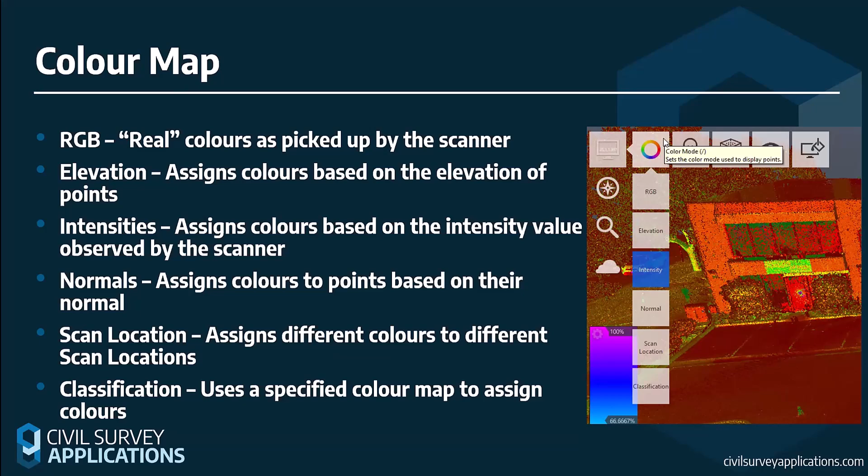But again, once you've gone ahead and done all this, you're then going to go ahead and edit your point cloud. Once that's done, you're going to export it out to Civil 3D. Civil 3D, again, allows you to import and view your Recap point clouds, and allows you to create a surface. You can create this out of either a portion, a selection of your point cloud, or the entire thing. You can also filter out different points based on different elevation ranges using the non-ground filtering option, which we'll talk about more in a second.

From here, you can do the general Civil 3D things. You can do your surface editing, point creation, point group control, and the point cloud color map can also be set here. So anything you've done in Recap can be mimicked here for visualization purposes. And you can do further cropping as needed.

So I mentioned non-ground filtering for filtering out points based on elevation ranges. You've got three different options here: planar average, Kriging interpolation, and no filter. I generally find Kriging to be the best option here. What it does is it finds an average of all your points, and it's going to use a curving method to basically filter out anything above that elevation range. It'll spike up where it finds things like trees, cars, and all that, as you can see in the little diagram there. And from there, it's able to get a better estimate of your surface, in my opinion.

If you're using planar average, it takes all of the points, finds an average value across all your points, and then filters out anything above that average.

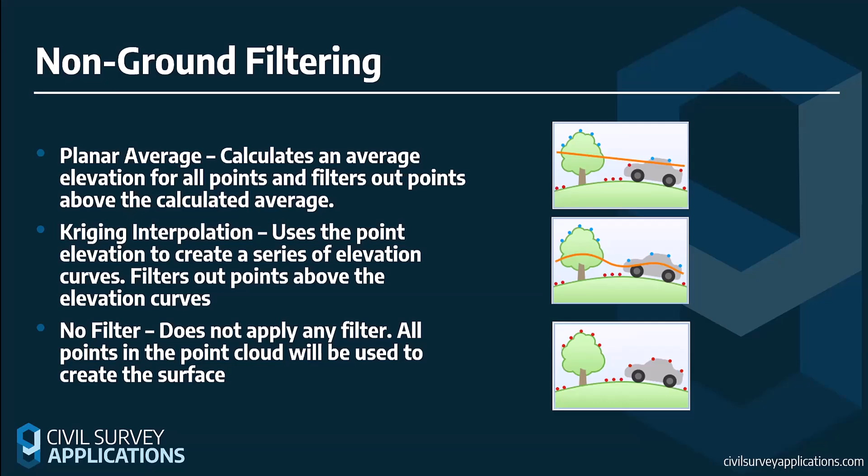So you might be asking, we've gone through the CAD options. We've looked at Recap. We've looked at Civil 3D. Where does Stringer come into this? Well, Stringer comes into this in terms of your line work, creating all that up, creating objects in your drawing, that kind of a thing. So you can create the points, you can create core locations along your point cloud using a variety of different tools that we'll discuss today. And then using those points, we're able to very quickly automate all your line work.

So you can see in the example off to the side here, I picked up the center line and edge of a road. I've gone ahead and created some points along there manually, very, very quickly. And I'm able to very quickly get all my line work created and set up ready to go. From there, I'm able to do any editing I may wish to do.

I can modify the points, I can modify the line work, I can get a 3D model if I desire. I can create objects on that 3D model if need be, and I can do things such as create scalable objects such as trees, pits, lights, all that fun stuff. So it's a very powerful tool to add on at the end once you've gone ahead and you've done all of your prior edits.

So the way I envision a workflow being, this is how I've worked on things on my end, is I see users importing point clouds into Recap, modifying how they want it to look, classifying, decimating the point cloud as needed. From there, cropping and deleting points further through a more focused method, exporting that data out to Civil 3D.

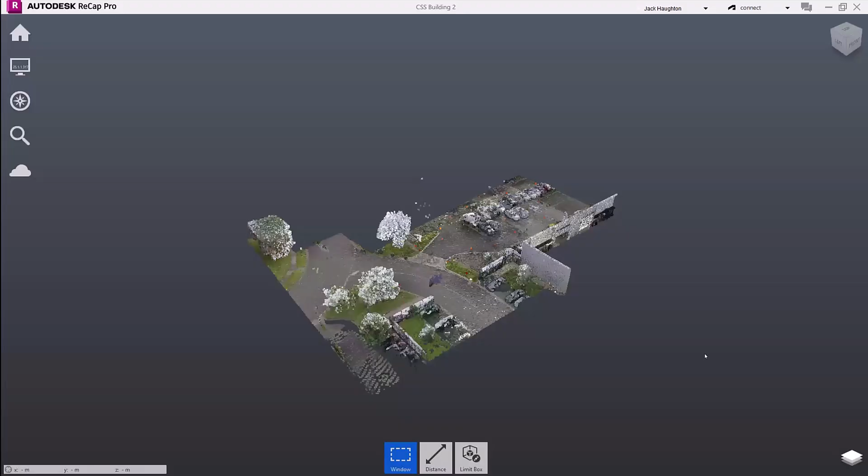And as you're in the project viewing space, once they finish processing, they will appear for you to work with. So we'll go launch project. Everything's going to appear for us. So it's just loading in now.

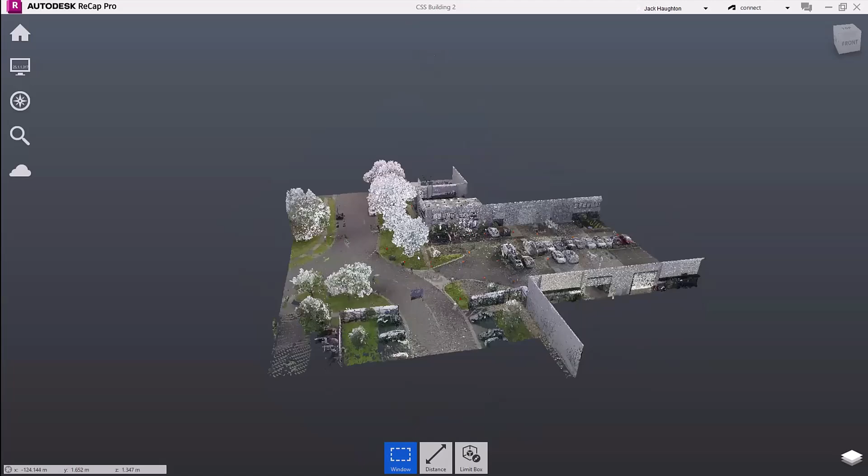And the way to navigate around here is middle mouse button to pan around. You can scroll using the middle mouse button to zoom in and out. And if you hold shift and then press down your middle mouse button, you can orbit around. So anyone's curious about how you maneuver, that's how you go about doing so.

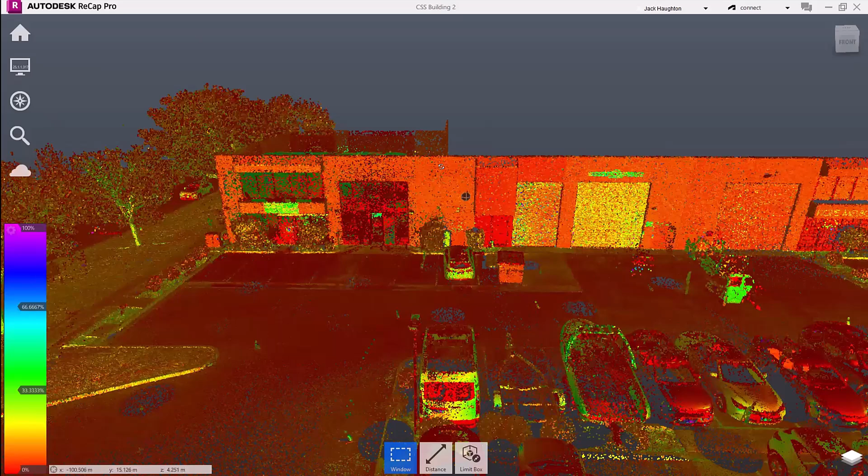Once you've imported all of your information here, so you've got everything set up, you're ready to start working with it, you can change how you want it to be displayed, and your display options can be found here. So under the first one, you have your different color map options. So say I wanted to change it over to the intensity. I can change that and you can see how the laser has reflected based on the color scheme you see here. If you want to change it over to something like elevation, you can, or a variety of other ones, as I discussed within the PowerPoint.

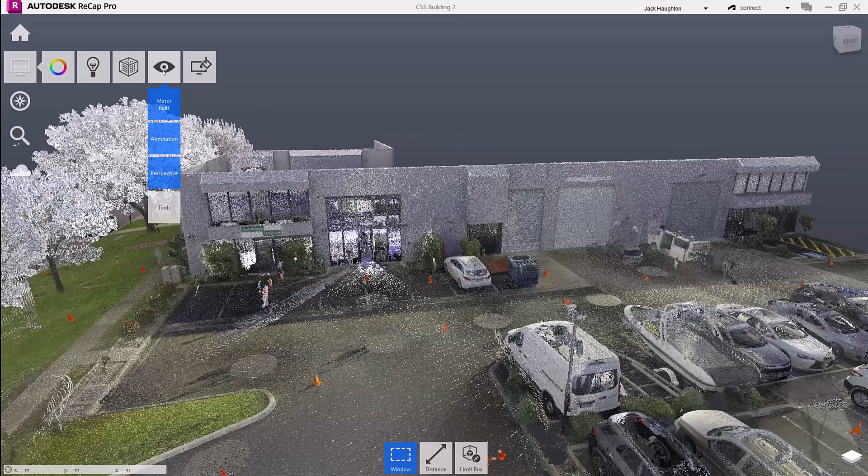You have other options to work with here, like lighting settings. You can change the point display, or you can change a variety of things here. I don't find these ones to be particularly useful. I primarily stick within the first three here, and even then, I mostly just switch to color mode, which is why I discussed them in further detail earlier.

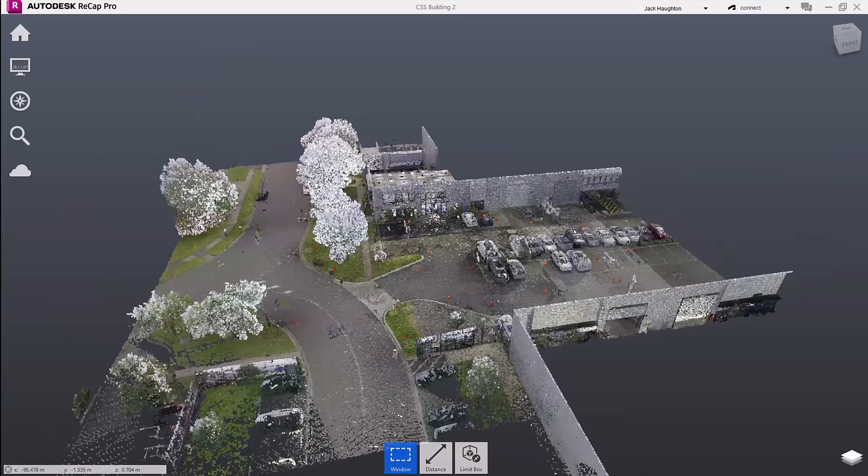If you're needing to select anything in this view, so let's say I want to classify an area, you can simply maneuver yourself so that you can very easily see what you want. I find using a side-on view, so I want to select all these cars here. I like going into as much of a side-on view as possible. Then I can very easily just use the selection tool. So that was just holding down the left mouse button and then selecting the area.

And then down the bottom, you've got a variety of tools to work with. We'll talk about Clip more later on, as I like working with that at a later stage in this. But if you need to separate this data out, you've got the ability to create a new region. This allows you to zoom back in on this location at any time using the region controls found over here. But you've also got the ability to classify this data. If you have not classified this automatically using your scanner, this is where you can manually do it.

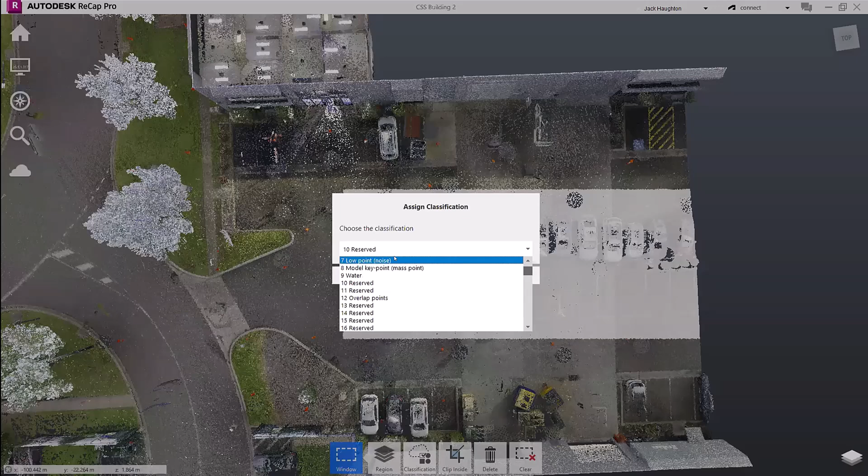So if we select this, it'll actually say, okay, what classification do you want to assign to the points you have selected? There are 12 in here by default, which you can see listed, and then you've got a number of them set as reserved. Reserved are ones that you are freely able to customize. They don't have any standard basis to be able to use from. The first 12 are ones that are commonly used by surveyors, so I would recommend leaving these as is, only changing the ones from 13 up.

In this case, we're not too fussed about what they're going to switch to, but you can assign them as needed. Click assign, that's going to assign those classifications. And you can see if we go over to this database icon here, classifications, we now have one set. And if I toggle that off, you can see they're now hidden.

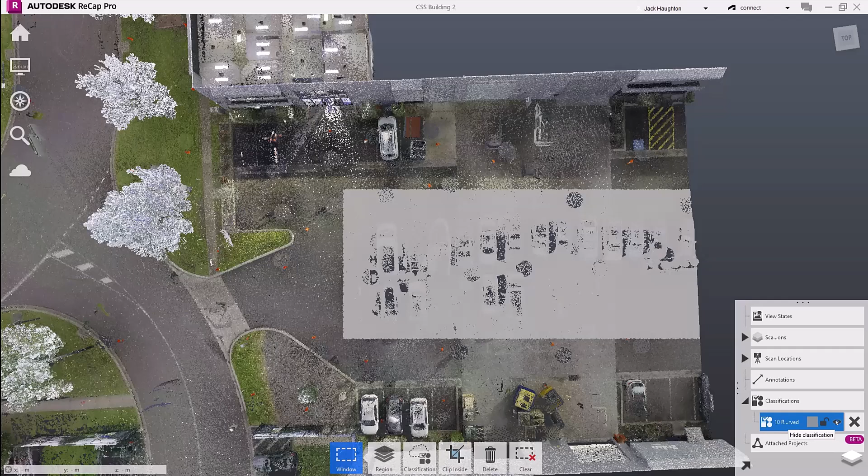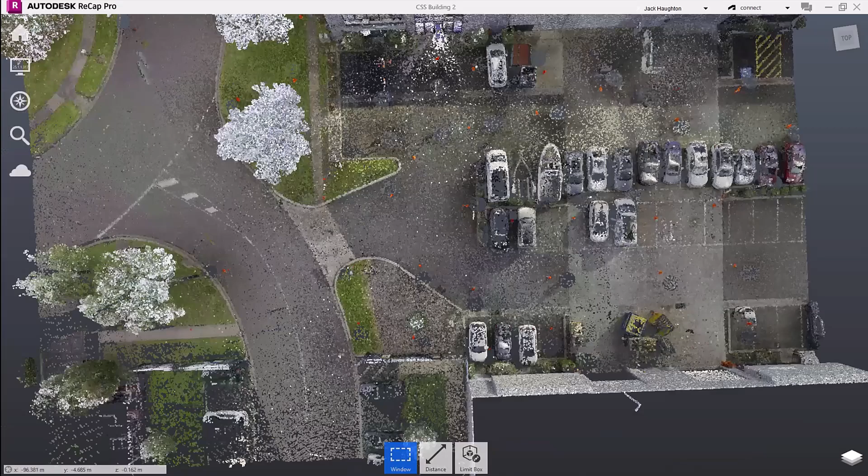One thing to keep in mind, even if you hide the classification, it does not work the same as how Clip will later on. This purely hides them. They can still be selected and they can still be edited. So keep that in mind. This will only turn off the display. We'll talk about Clip and delete later on, but the last option here is clear, and that just clears your selection that you have set. So very easy to work with.

Next up, what I would like to do is basically configure how I want this to work. Depending on what you're going to be doing with this point cloud, you'll probably run one, if not both, of the next steps. If you go up to Home, you can come across here to these two options. You'll have to hover over the automatic ground classification for the bottom one to appear. But these are the automatic ground classification and the decimate points options.

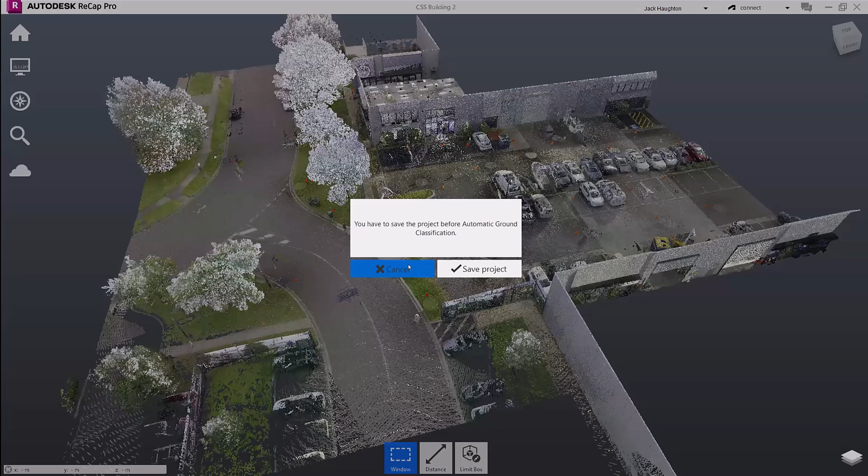Both of these are very handy in quickly filtering out the data in your point cloud, ready to be brought across into Civil 3D. Now, if you're just looking to get a surface out of this, and you're not too fussed about having the features or anything, I recommend just quickly running automatic ground classification. Running this, it's going to basically just ask us to save it, and then it will go ahead. I won't run this at the moment. We'll see the results for it shortly.

Once that's run, it's going to go ahead and try and separate everything out based on whether or not it thinks that it's working with ground or with an object that isn't a part of the natural surface. So it'll automatically run through and do that. And in my experience, it actually does a pretty good job of filtering all that out. It's not perfect. You will have to go through and manually do some clipping or deletion, but it is a very powerful tool.

The other option, if you're wanting to retain the majority of your data here, is decimate points. Decimate points allows you to separate your data out into different classifications. So you can see here, I currently have source classification as reserved. I'm going to export out a part of my point cloud into a different classification, in this case, model key point. And you're able to decimate by either an approximate percentage. So if you just want a general amount to be removed, use that.

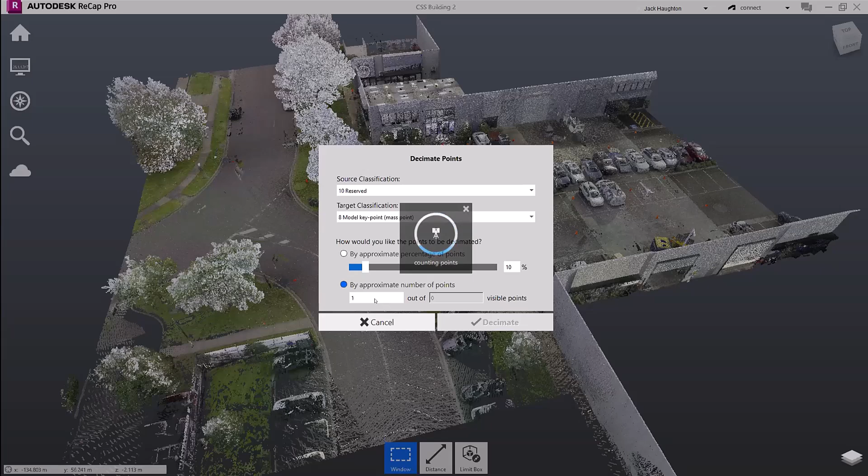Or you can go by approximate number of points. It'll go ahead and list the entirety of the points in your drawing, and you're able to filter out by whatever number you decide. So you can see I have this obscene number here to work with, and I'm able to filter out as many as I want. It'll place all those into the target classification, ready for you to work with as needed.

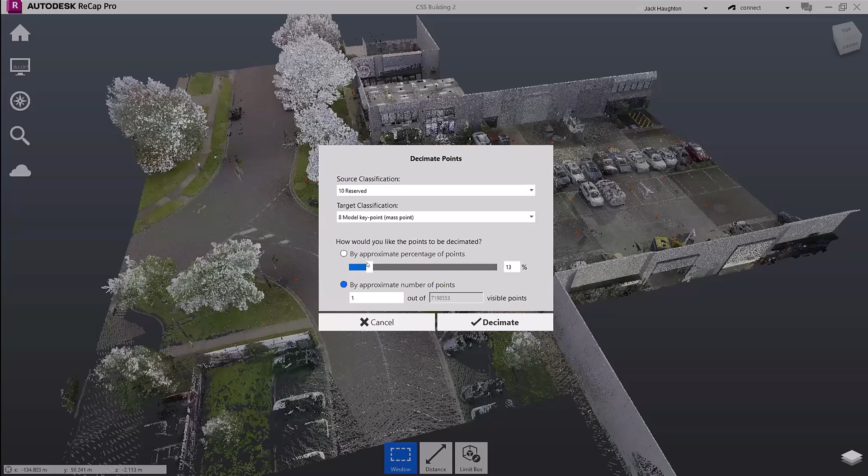Now, this can take some time depending on, A, if you've already gone ahead and deleted or clipped points in your drawing, and B, how many you're working with. So if I move this up to 50%, for instance, it's going to go ahead and decimate at 50. That's going to take longer than if I set it to something like 10%, for obvious reasons. Depending on your laptop will be how long it processes for. I recommend setting that up and then going and getting a coffee or going for a walk, depending on the size of what you're working with.

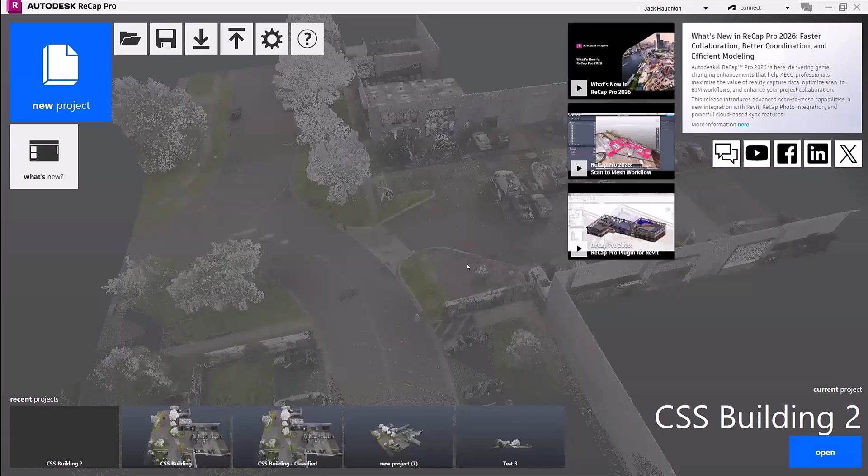So we're just going to go back to the home screen, and I'm going to open up the exact same drawing that's already been classified and has had a decimate run on it. So we're on this one here. You can see it's a little bit more blurry when I move around. That's a result of the decimation. It's just separated everything out. If I go down to the classification here, you can see that I have two here to work with. This is the result of that automatic ground classification that we ran earlier.

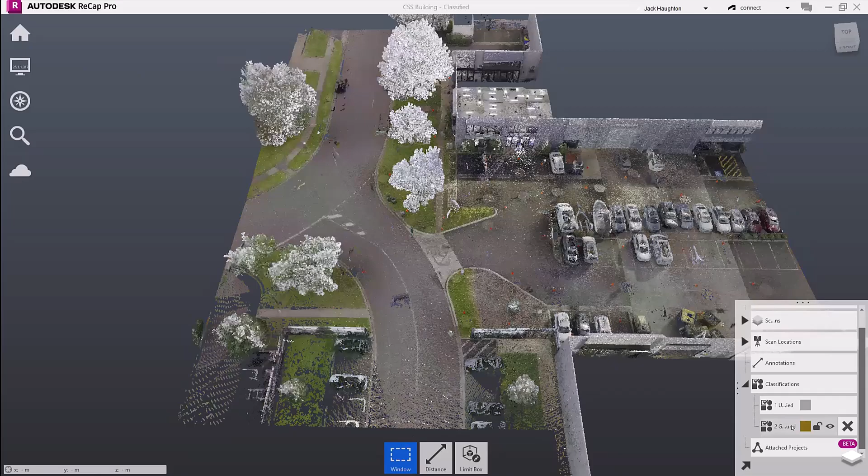If we open that up, you can see I've got two here to work with. And if I hide the ground, you can see how it's gone ahead and ripped out everything it thinks is not a part of the ground. It's done a pretty good job with that. So if we turn back on the ground now and we switch this around, you can see it's not quite perfect, but it's done a pretty good job of it. So we'll clean this up.

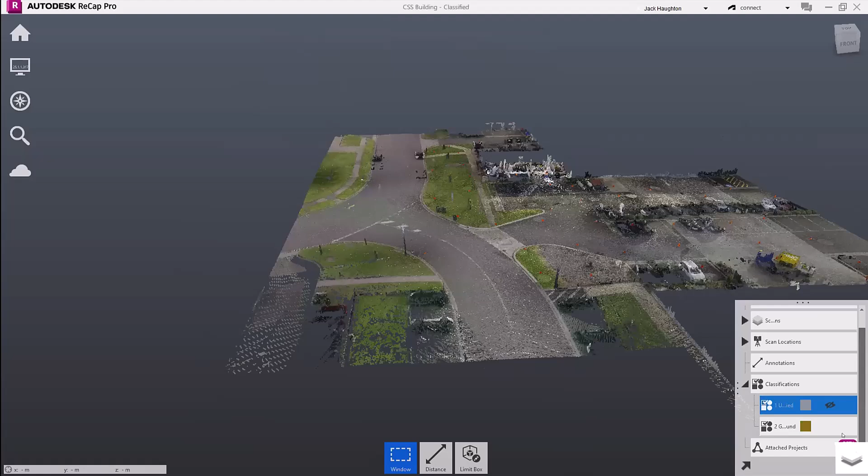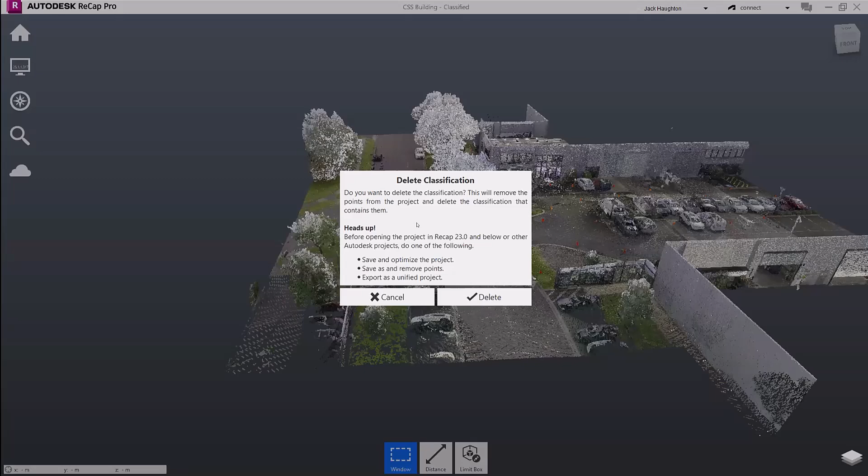But first off, let's get rid of these points. We're looking to create a surface out of this. We're not really interested in the other features here, like the building. We only want the base pad of it. So to get rid of these, there's a number of ways to do so. You can just select this option here, delete classification. This will just say, hey, look, you're deleting this. This is going to remove all the points from here. You can go delete. It's going to go ahead and strip all of them out.

If you want a more focused approach, I like, again, just getting a bit of a side-on view and then just using the select tool. So again, just right-clicking and selecting what I don't think I need. And you've got the ability to either clip or delete.

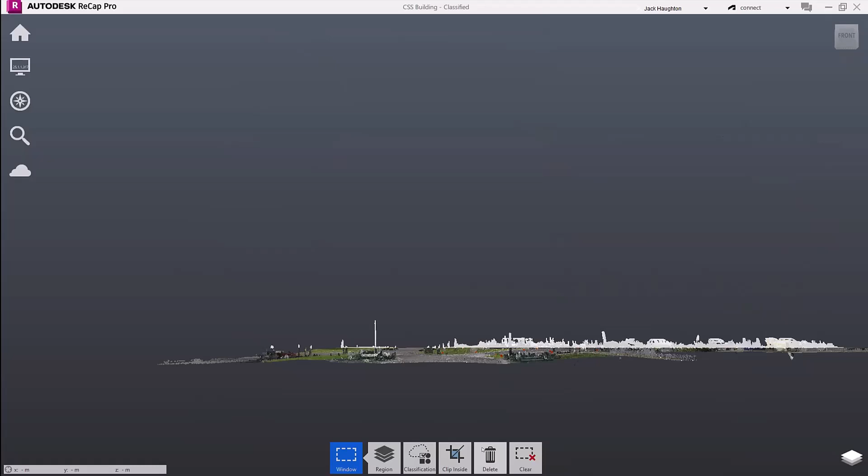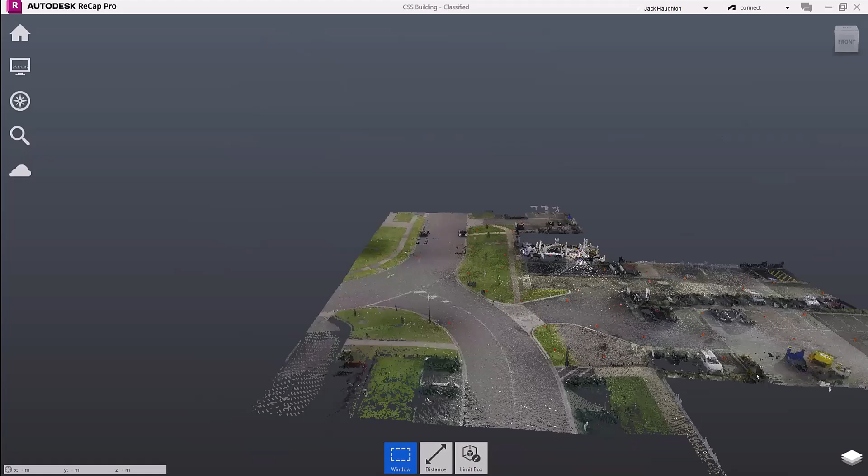Depending on what you're requiring will depend on which one you're using. If you're just wanting to turn these off basically temporarily, you're not looking to permanently export with all that included, just use clip. So we'll just go clip inside. That's going to remove all that excess data. If I export at this point, all those points won't go with it, but I can very quickly go unclip all to bring that data that I just removed back.

Further to this, any points that have been removed via classification can tend to export when you run the export command I'll talk about later. If you remove via classification, I highly recommend going to Home, dropping down the save icon and going Save As, and then just saving this as a new RCP file. That will force your deletion to remain and will make the file smaller, but it'll also shrink the base point cloud.

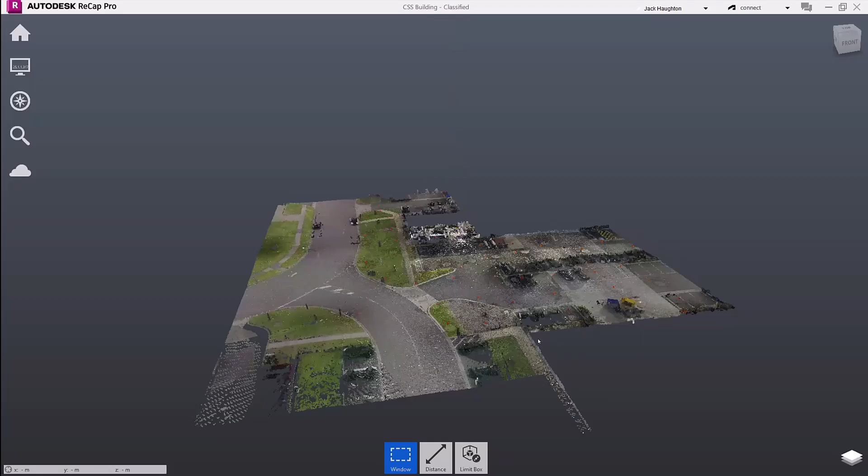So it creates a new point cloud out of this, which will be of a small size and allow you to work with it. If you're importing into Civil 3D, this is a very important step, as a smaller point cloud means it's going to run faster and better. I also recommend doing that anyway, just so that you have an original point cloud file in case you do need to revert back to the original. It just allows you to have a backup in case. So a very important feature in my opinion.

Yep. From there, you pretty much just go ahead and fiddle with it until you get something that you like, and you're ready to export the data that you wish to work with. And there are two ways to go about exporting. If you're planning to work more with the building side of things, so this is getting your internal walls, working with the architectural side of things and all that, I recommend running the publish command.

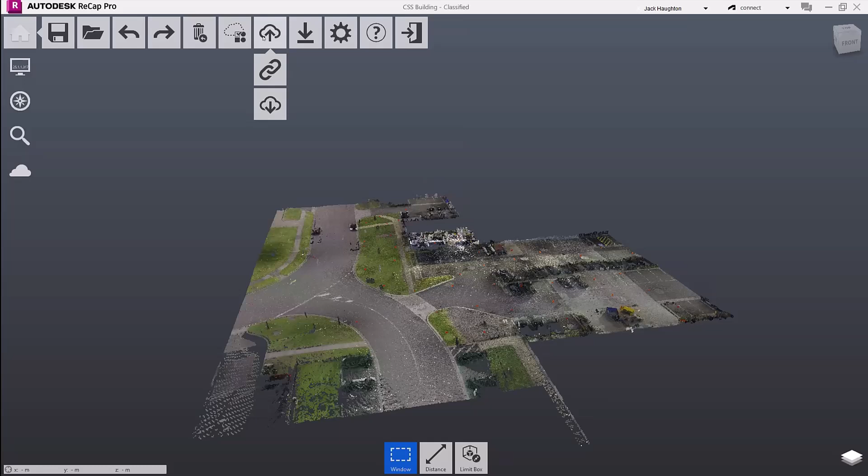Publish will push it out to your Autodesk Cloud and will allow you to run the ReCap version on the Autodesk Cloud, along with Revit and a number of other functions, which we'll go through later, and allow you to very quickly draft that up. The other option, if you're working more on a feature survey, you're just wanting to get the basics out and work with them in Civil 3D, I recommend running the export command found here. Export will allow you to export this data out as an RCP file.

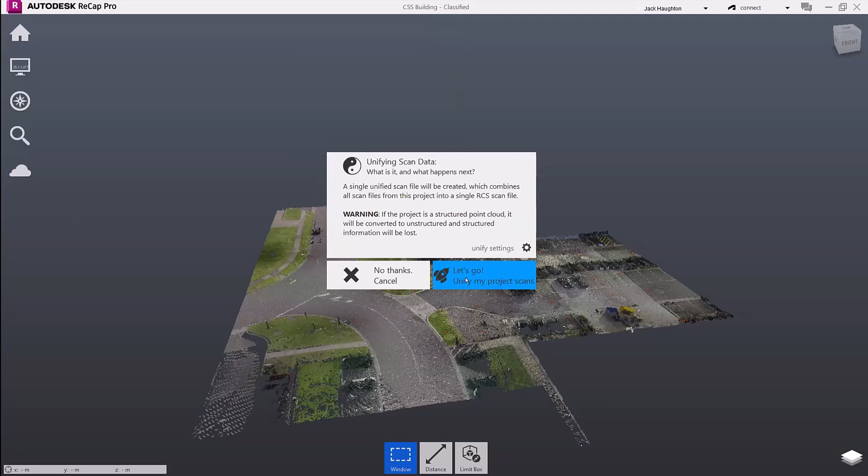So we'll call this one CSS new. And we can very quickly push that out. At the end, it's going to ask us to unify the scan data. So this is just going to merge all your separate point clouds together if you've done so, and then push it out ready for a Civil 3D import. So let's go unify my project scan. It's going to go through and export all this out. It shouldn't take us too long. And see, it's going ahead and doing that.

The other option that you saw in that home ribbon was the ability to import. If you have other files you're wishing to attach after the initial import, you can just select that option, the one right below export, and you are able to bring in additional files as needed. This includes additional folders. So if you've gone out day one, done a large amount of your scan, imported it to make sure everything's good, realized that something's missing or you need to go back and do the survey again, it's exported from your scanner as a folder. You can import both that folder and the individual files depending on what you need.

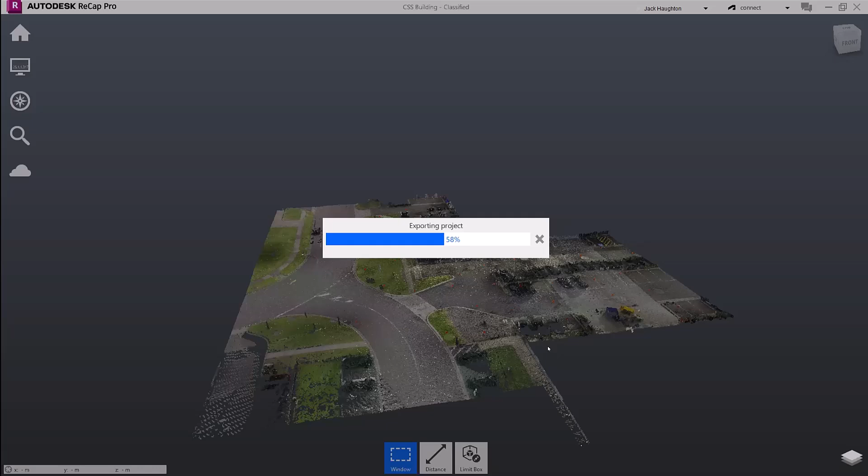So it seems I've exported a few too many points for this to quickly be done, but we'll just skip ahead for now. And I'll just go straight to Civil 3D. Cool. Bit of a sneak peek.

It's because it's trying to export that point cloud at the same time. So we're going to work with, at first, a blank point cloud here. So working with a blank drawing, there is nothing that's been imported into this. And we're going to look at importing in a point cloud ready to go.

To do so, all you need to do is go to Insert on your ribbon. And from here, you've got the ability to attach a point cloud. Select that option. It's going to navigate to a default location. I've got mine set to here, and you're able to import from there. I've already got a CSS road decimated RCP file, so I'll work with that for now. But the other one that was exporting would also be found here, as I've got this set as by default. So I'm just going to select that.

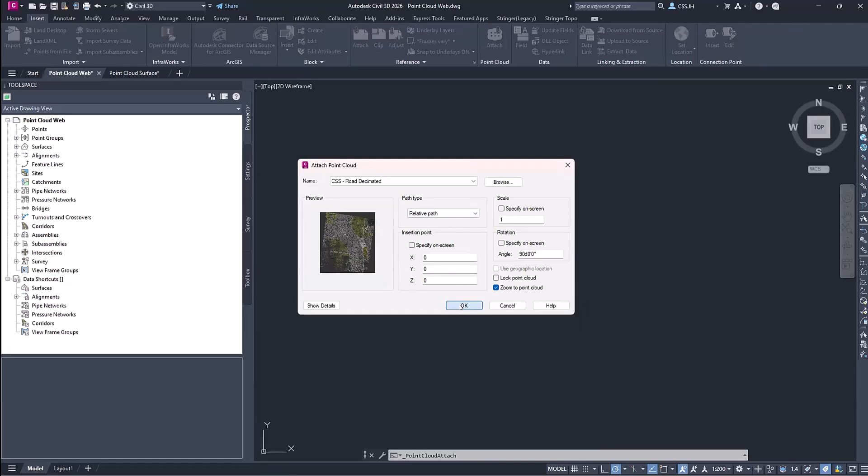If anyone's brought in a PDF or an image before, this screen will look very familiar. You're able to specify on screen where you want it to be. You can specify the path type. You're able to scale things as needed or even rotate it. I'm just going to leave it on basics for now, so it's going to import at 0, 0, 0. I'm going to go OK, and you can see how quickly that gets imported in. Admittedly, this has been modified a bit more heavily than the one we just exported, but not to a vastly different degree.

From here, you can select the point cloud. That will open up the point cloud part of the ribbon and allow you to do a variety of different things. First up, you've got the ability to modify the display of it. So pretty much this entire first section is set to that. Changing the point size is going to change the size of the point. So you can see it becomes a lot more dense looking as I push that up. I generally keep it on a 2 as I find that to be a good balance between knowing if I've decimated too far or if it's got some holes I need to look at patching by going back to ReCap.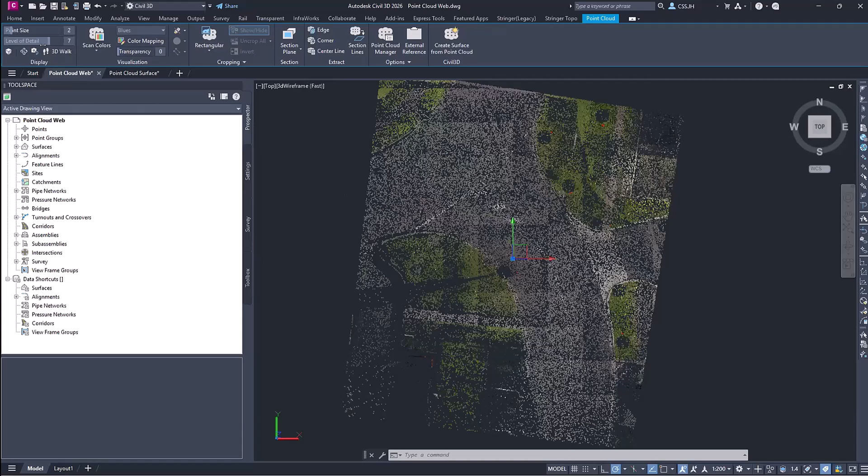You saw how quick it was to be able to bring in that point cloud. It's not a big thing, at least in my opinion, to just quickly go back to ReCap, fill in any holes you might need, and then come back here. You could even import another point cloud as needed. Level of detail, you're able to turn that on and off as needed. So it's just changing the density of that point cloud. If you find you're having some lag once you've imported, I recommend just modifying this. It might make it a bit easier for you to work with.

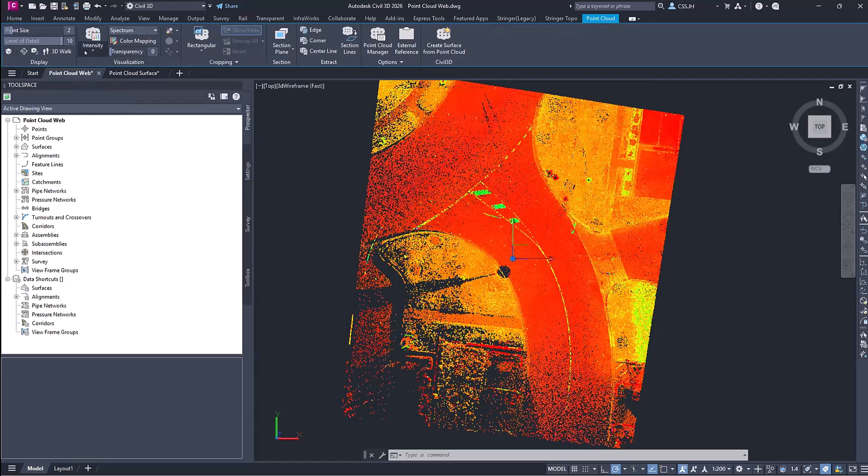The scan colors option you see here works much the same way as it did within ReCap. If I switch over to intensity, you can see that I'm able to switch between these. And if you wish to change the color mapping, you can go in here to change the color map for intensity, elevation, and classification as needed. The classifications will be set to whatever they were in ReCap. So if you've set them up manually, automatically, or via your scanner, they will come in and you'll be able to work with them as needed, shown here.

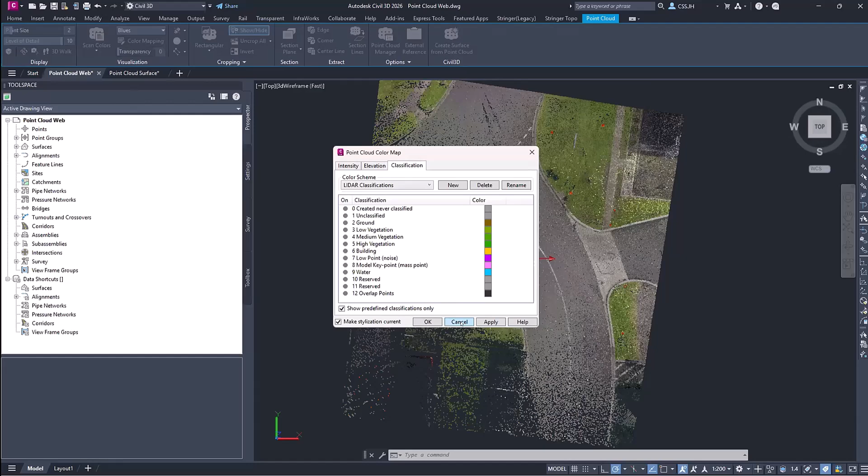Oh, whoops. Clicked too many times. Once you start actually working with the point cloud, transparency becomes a very useful tool. The point cloud, I find, is dense enough that it's hard to see when you've worked with points. I like just turning this up a bit as I work through it. It creates a transparency for other objects you may create, allowing you to very quickly be able to work with them.

If you need to crop your point cloud further at this stage, past the ReCap point, you do have the ability to crop out using rectangular, polygonal, or circular. I still much prefer doing this in ReCap. ReCap provides a much nicer environment to do this. I find doing it at this stage to be slightly laggy depending on how many points are here, but it's up to you when you want to run it. It's just preference for me.

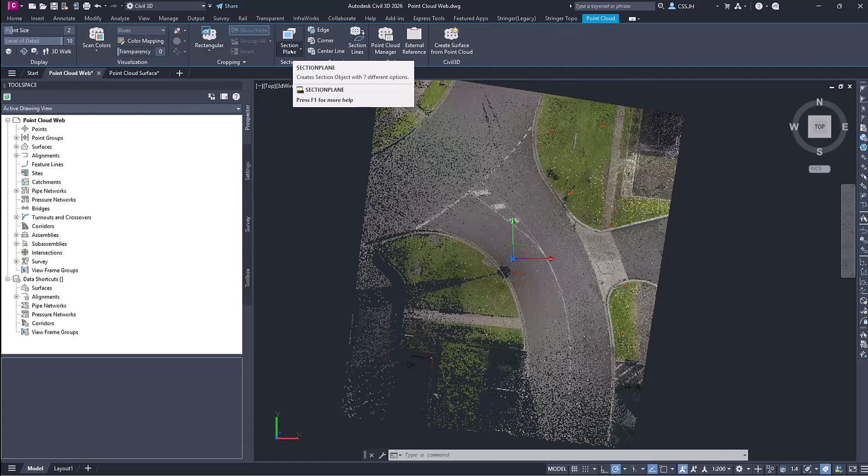Section plane can be very useful though. Section plane allows you to basically remove certain aspects from your database here. So if I realized I really don't need something on the vertical plane, I can create a top one. And if I spin it around here, you can see that we've got a horizontal plane to work with. And if I click on this arrow here, I'm able to remove or add. Oops, I've clicked on the wrong thing.

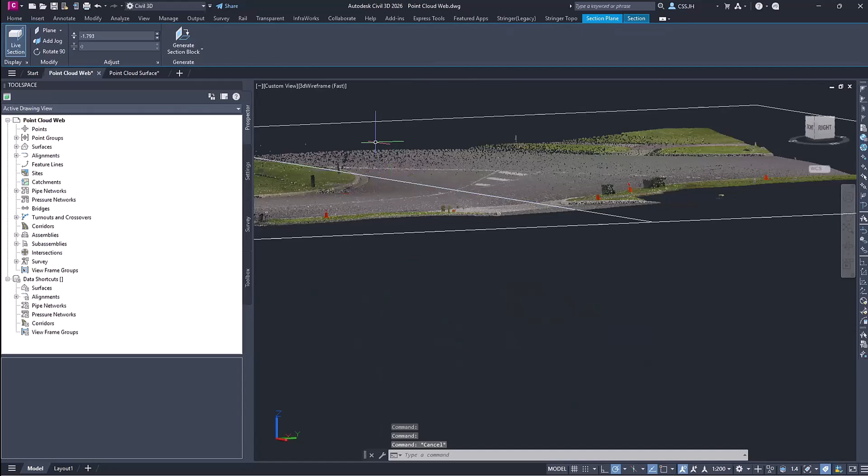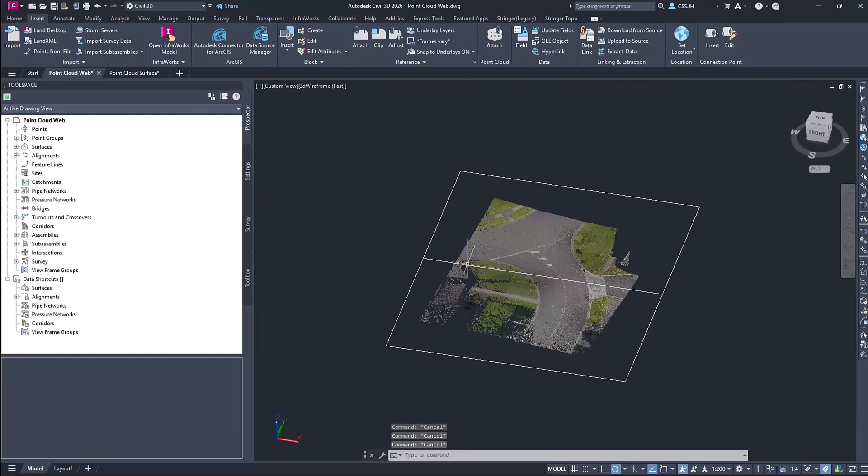You can see how I'm cropping stuff out as I move this up and down. This allows you to very quickly work with it as a visualizing tool. You don't have to just work on a top-down perspective. If I escape out of this, it just removes it from play.

You can also work front to back, left to right, whichever way you're wanting to work with it. It can be a very handy tool for very quickly removing certain sections of your point cloud from play. If you're working with buildings especially, this can be used to very quickly separate out the floors, allowing you to go ahead and do any edits you may need.

If you brought in multiple point clouds to Civil 3D, the Point Cloud Manager allows you to toggle these on and off as needed. So if I toggle this off here, you can see that it gets removed from play. Very handy if you've got multiple that you've stacked up against each other. I brought in one once with, I think, something like 18 different setups that we'd done. And this was very handy for being able to turn off different aspects of the building so that I could do rooms individually. So if you're needing to do that, this is a good way to do it.

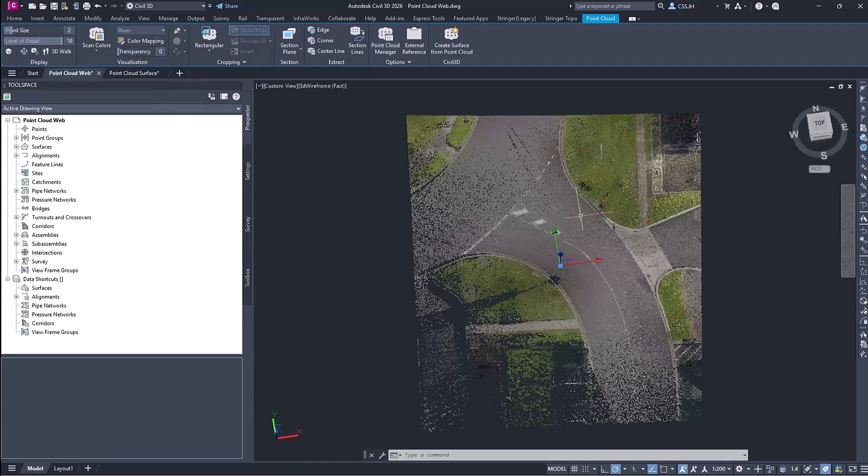Also handy if you've got too much data here and a lagging computer: turn this on and off. It allows you to get quite a substantive speed increase on your PC. So it can be very handy for that.

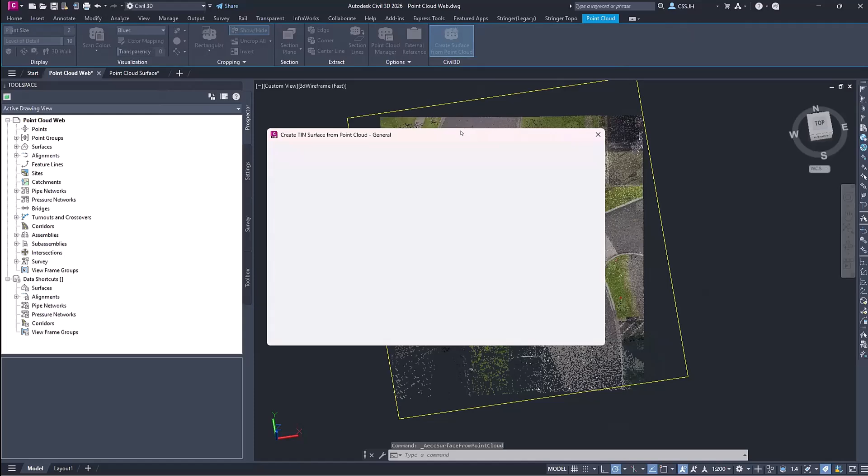So once you've got the point cloud imported and ready to go, you're then wanting to create a surface. So you go create surface from point cloud. You can see that it's highlighted what it believes to be the point cloud we're wanting to work with. You're able to choose the style of the surface, exactly the same as if you're working with the Civil 3D surface tool.

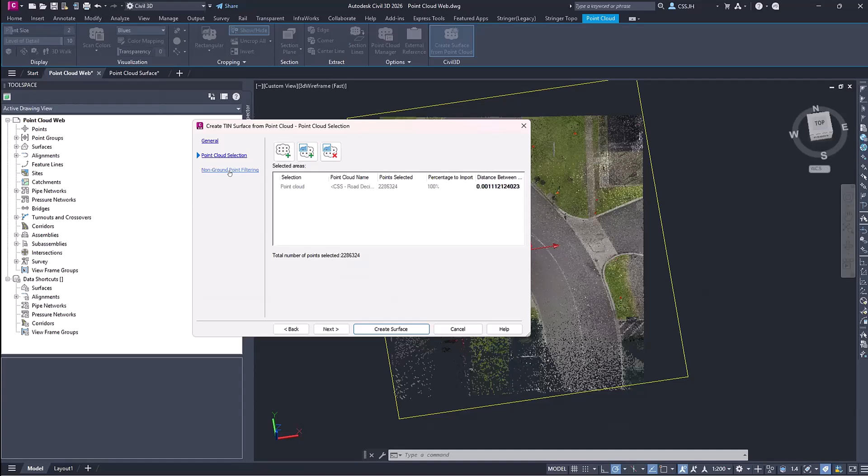Point cloud selection allows you to choose whether or not you want to work with a selection of points, if you want to remove certain points, or if you just want to work with the full thing. Just using these options here, you'll get an idea of what you're working with. You can see here how many points I'm working with, a vastly lower number than what we saw earlier, and the rough distance between each of those points. And then if we go to the non-ground point filtering, you get those three options that we discussed earlier.

As I stated, I primarily use the kriging interpolation function. I find that one gives me the most accurate surface while still removing a lot of the objects I don't wish, followed by the planar average and then the no filter, in my opinion.

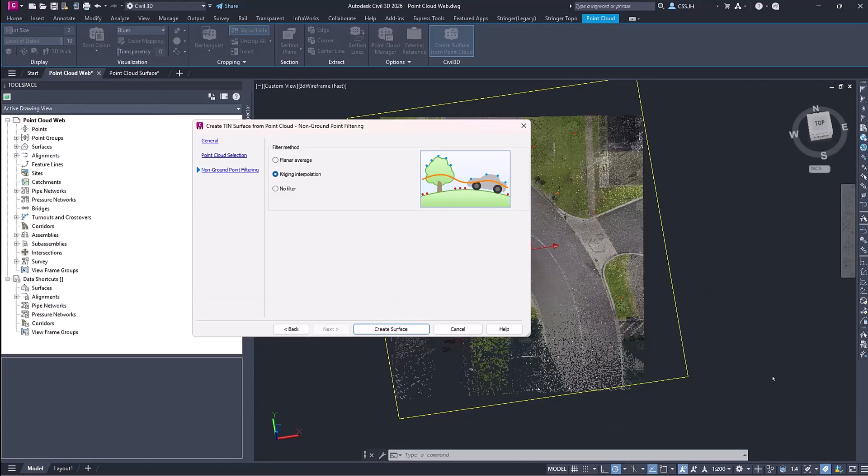Depending on the option you choose, once you go create a surface, the software will start creating a surface. You'll get an icon down the bottom corner here saying the surface is being created. You can still continue working on anything that you want within the drawing.

However, if you make any edits to your point cloud, things like cropping and such, be aware that this can cancel the surface creation. You will get a message saying that it has been cancelled, but it can happen if you edit the point cloud in such a direct way. Things such as changing the scan colors, creating new points, all that, you're completely fine. It's more the removal or editing of an already existing point cloud. So just keep that in mind.

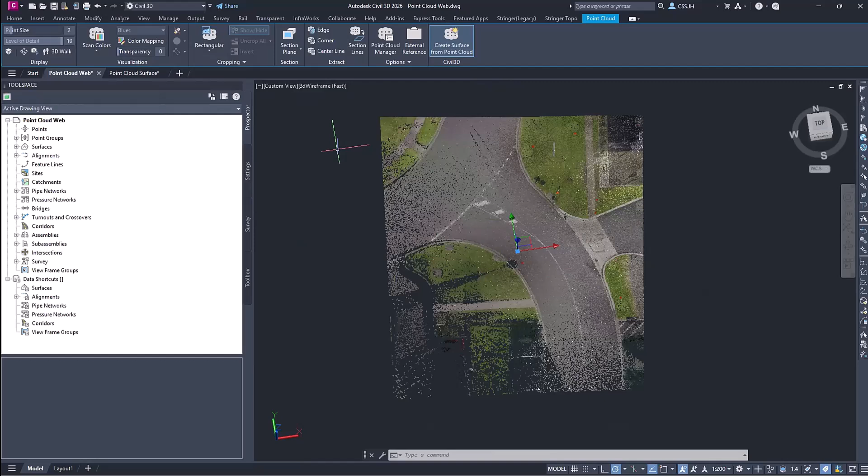So, what happens after the surface is created? Well, you'll get something along the lines of this. This is the exact same point cloud we just saw, but I've already created a surface. If we drop this down here, you'll see that one's been created.

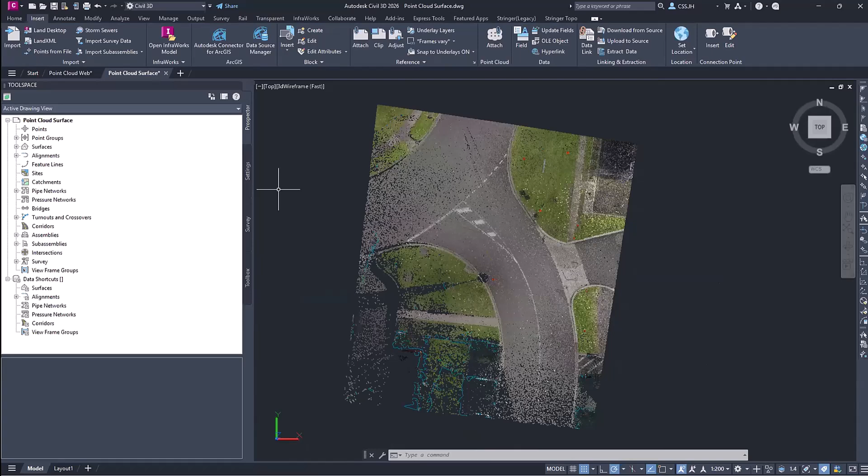More than likely, the surface will be too large for Civil 3D to handle, depending on how many points you picked up. It'll just ask, are you sure you want to export? Are you sure you want to work with this as a visual display? So it'll create that surface in a separate file, which then links into this, allowing you to work with it as needed. So I just hit accept, and then I'm able to do what's needed.

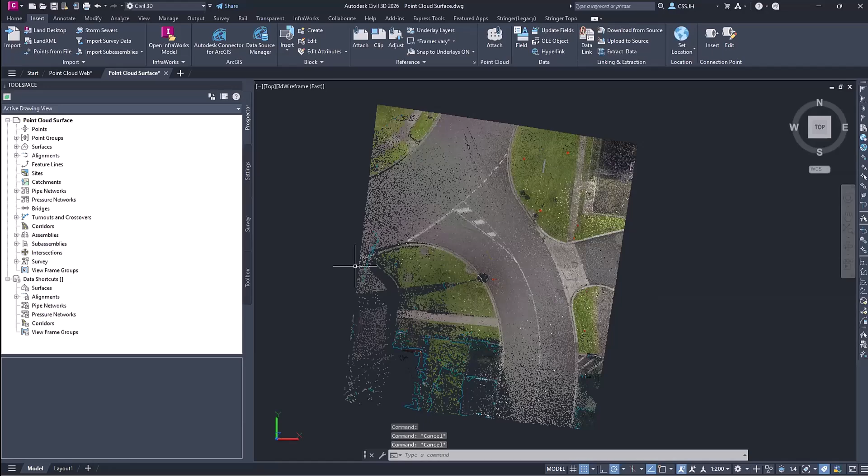After all this has been imported, the step I'm most likely to choose is to create some line work. So how do we go about creating our line work? Well, we need some points to work off of. And I don't mean point cloud points, I mean points with a code and a string number attached to them so you're able to work with them.

I like making sure I'm in a position where I can see everything. So, same as ReCap, I like being in a side-on kind of position. I've just realized I've moved us a bit too far, so I'm going to switch back to top once it's finished generating its contours. Because we've got a 3D space in Civil 3D, if you rotate it around, it's generating the contours live, trying to give us the best representation.

I'll close this just to free up a bit of space. My computer's probably overclocking at the moment as it's running a lot of high-end programs.

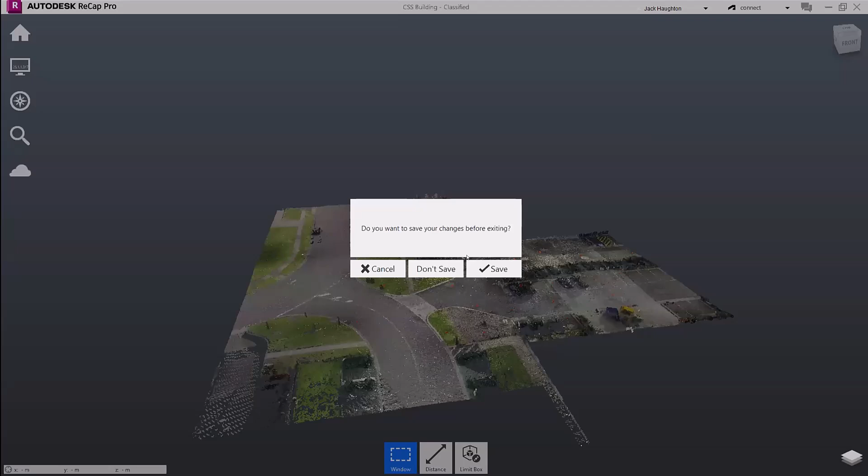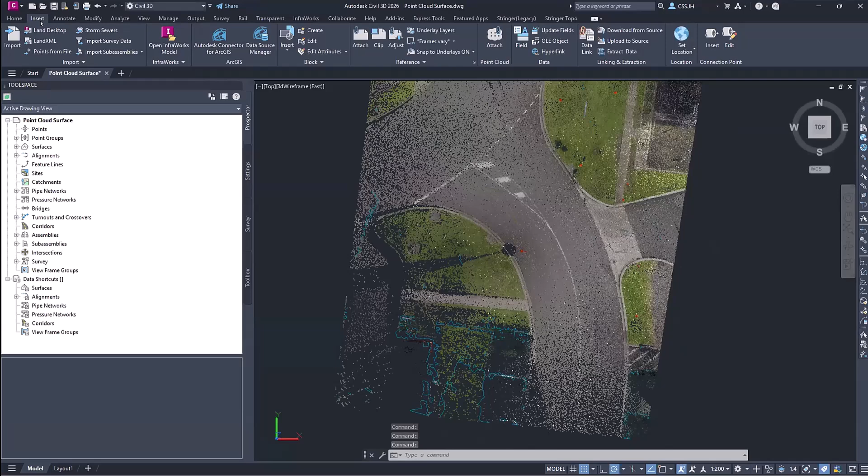While we're waiting for that to load, are there any questions to discuss, Shane? Jack, there are no live questions at this stage. There was a general question about processing that survey data, but that was answered. So we have no live questions.

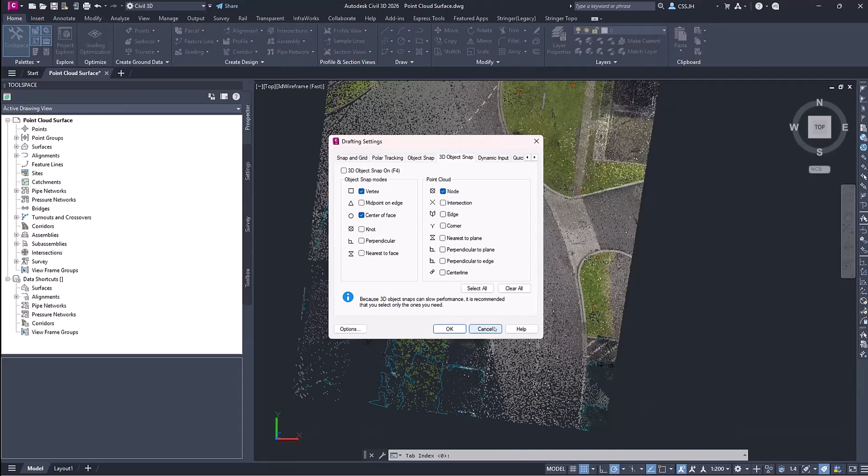If you are wanting to just create points manually, you can toggle on your snap to drawing grid, and then you can use your snap tools here. You can switch over to 3D object snap and set these up. It'll then go ahead and snap to the point cloud for creating those points. But because we've got the surface created from this, I like going off of the surface.

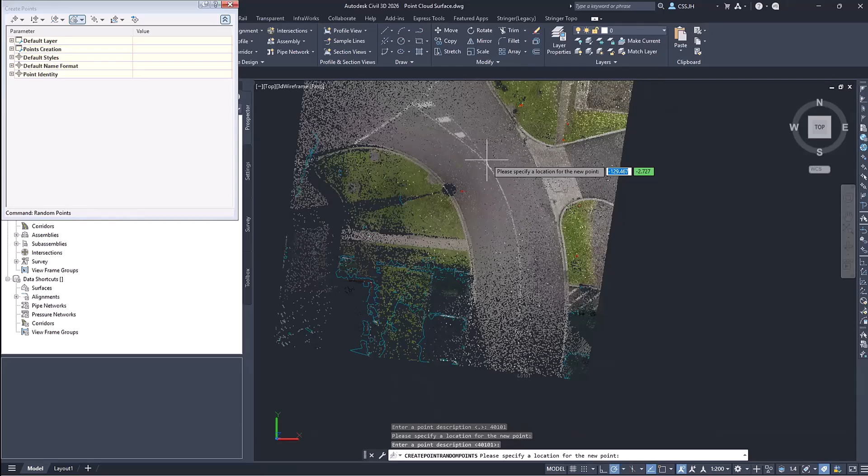So surface random points. I'm selecting the surface I wish to work with. So that's this one here. And then I can go ahead and start creating these. So it's just location for new point. Let's go here. Enter a point code. So 40101 for our center line. And I'm just going to create a few points along here. You can see how quickly I'm just going ahead and making these. And we'll create another one over here. We'll call this one 02 for a new string.

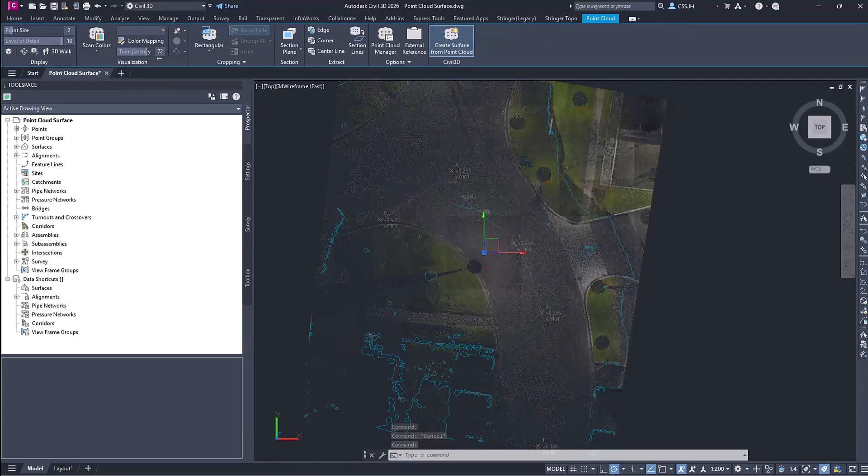So once we've gone ahead and made those points, we can then go over to Stringer Topo, and this is where we can automate our line creation. We've set up those points. Those points have a code and string attached to them. So let's turn on the transparency so we can actually see all of our points. So we can see our points being created here. And I'm going to go Stringer Topo, create our strings. And now for anyone using Stringer, we're back in Stringer land. So I can set it up for numeric, contourable, create the survey strings.

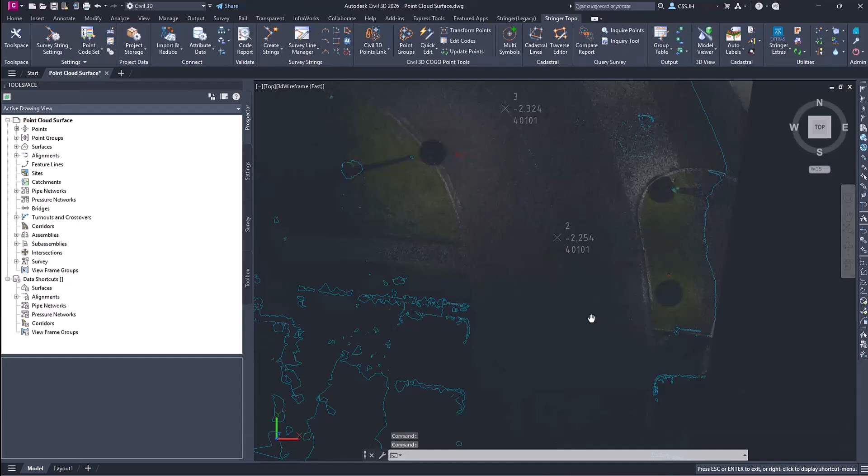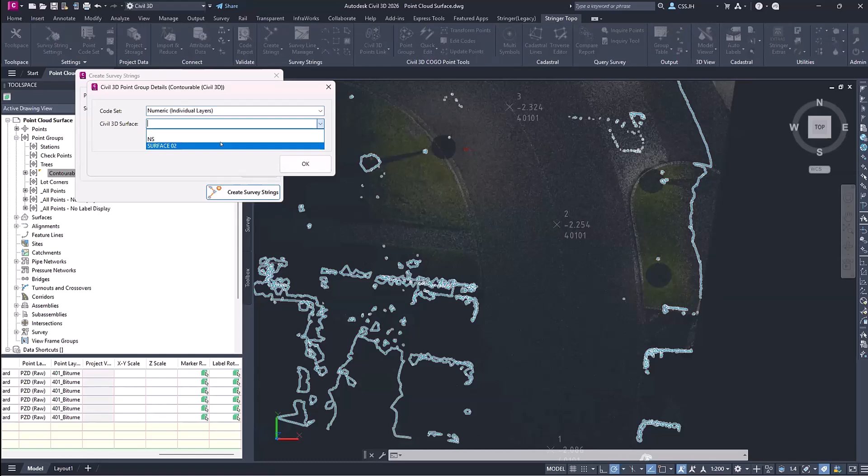That's on me. That's because I set it up at a 0 elevation and I have this set to ignore anything below 0. So let's try that again. So we see it's gone ahead and it's created the strings ready for us to go. Now, looks a bit messy at the moment. That's because I very quickly went ahead and did that. But if we then go properties, we can start doing things like, well, we could have done this earlier. I'm just doing it at this stage, but I'm attaching a .f to this code here.

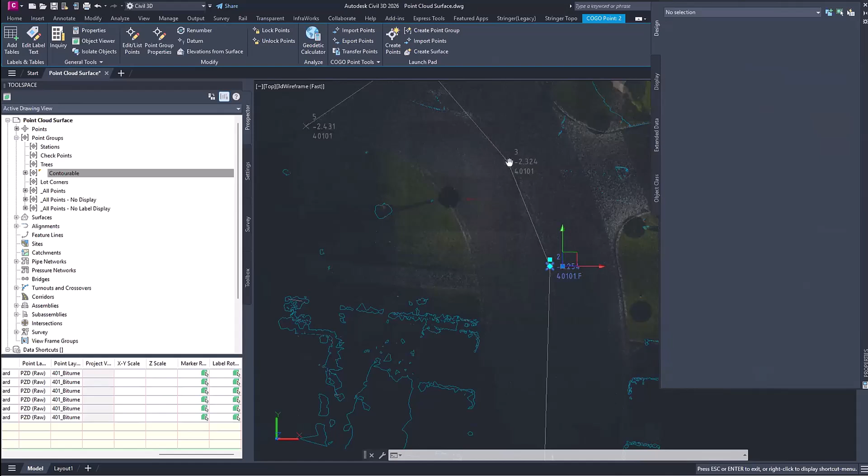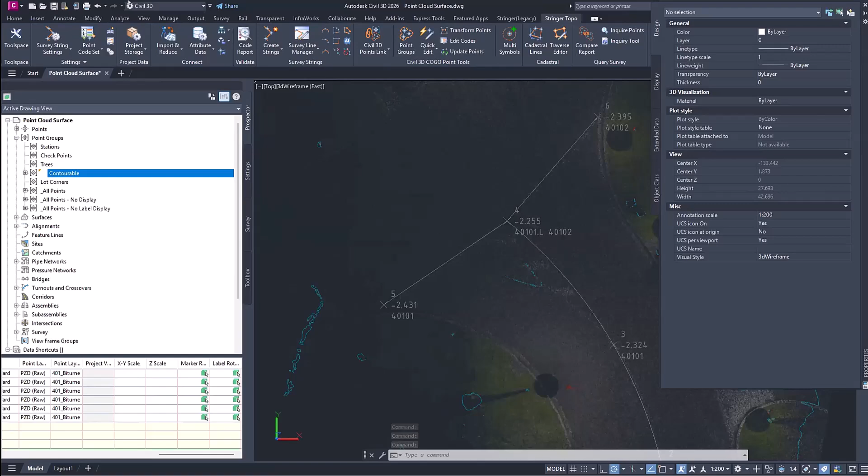Going to go up to this one. We're going to attach a, so we're two selected, .l, and then a 40102. And then if we go back to Stringer and we go update strings, you can see it's now got that curve. So it's curving around there. We've got it connecting both of those up at once. We turn off the transparency. Let's change the color of that string so we can actually see them a bit better.

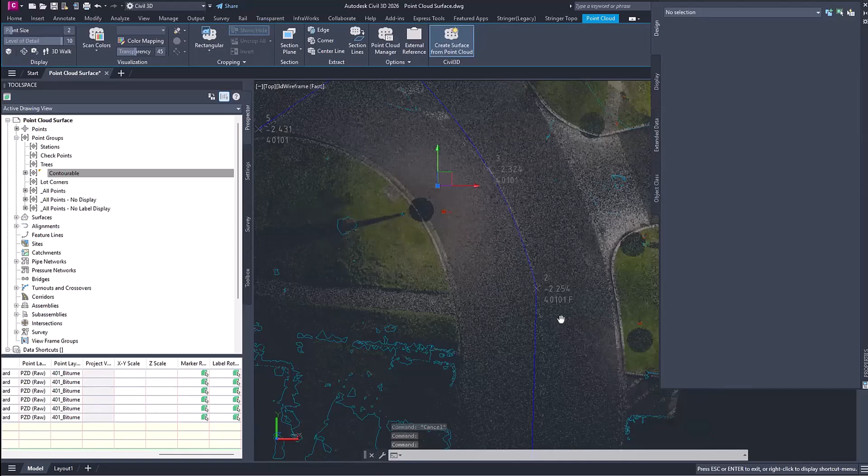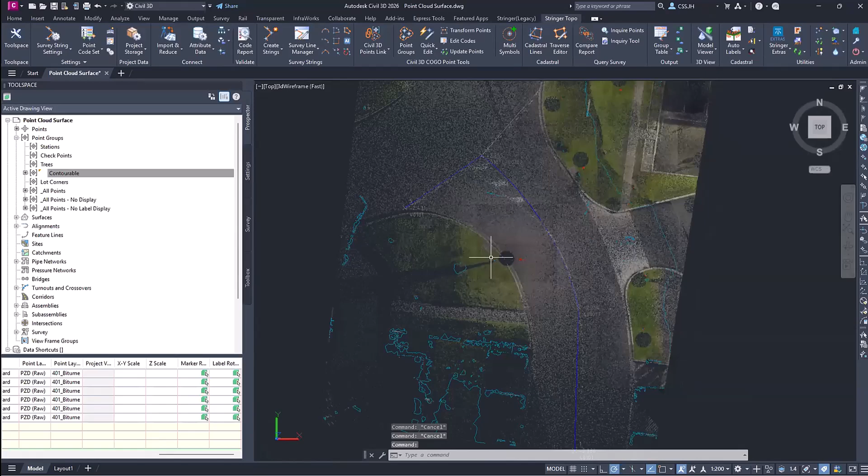We can see it's hugging that center line pretty accurately for me putting in those points very quickly. And you can go around and do that rapidly to all of your survey, very quickly getting objects in as needed, putting points in, getting your trees, getting pits in at a very quick rate. Allows you to get your line work set up very quickly, ready to go for your next step.

Once you've gone ahead and set that up, I won't show it today just because it does take a while to open, but you can run Model Viewer. Model Viewer will open up a 3D model of your surface and you're able to overlay your line work on it. As it stands, I've actually created 3D polylines out of this, and we can see that represented here.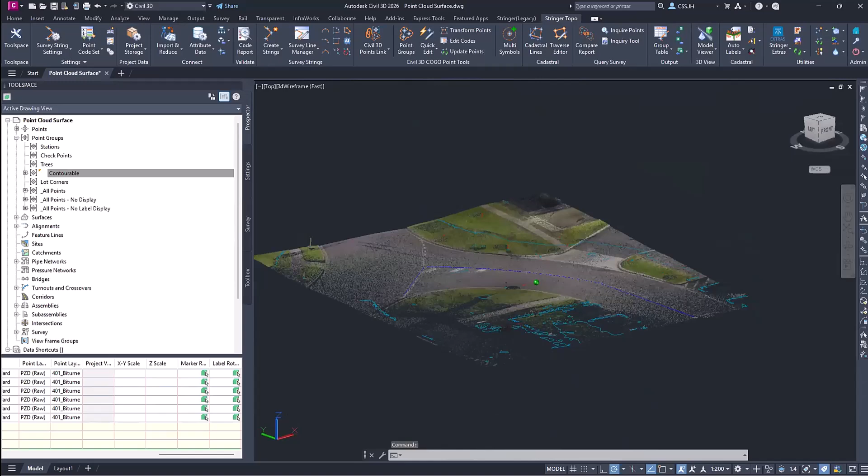It's sitting pretty much directly across our surface. Not as clean now that I've moved it and the surface moved. You can see that line work sitting there. But if you're wanting to get this in a 3D model space that's very rapid, very quick to move around in, I highly recommend running Model Viewer up.

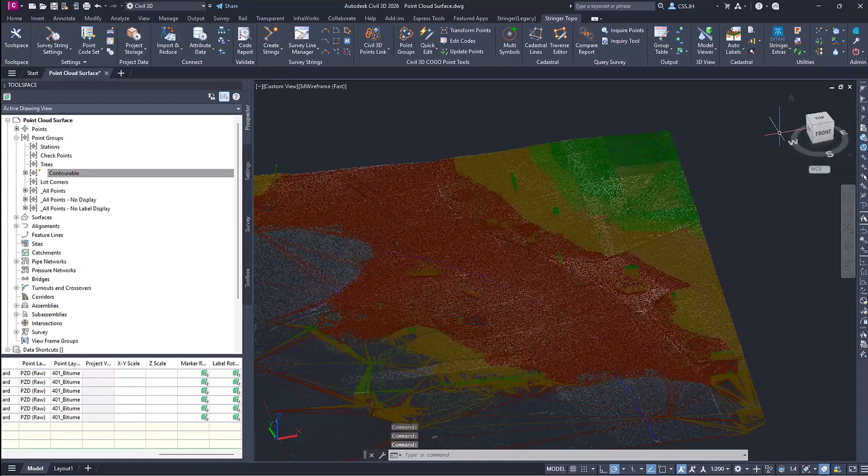It'll allow you to visualize everything very quickly, very neatly, very, well, fun, in my opinion, and craft objects over the top of it, depending on what you've created. Personally, I will generally do up some trees and run those up. And it allows me to very quickly just see the trees where they're sitting, if they're overlaying anything, and how I might need to work with them. So very handy for that.

But on that, we've actually gone ahead and, well, finished working with Civil 3D. From here, it's just a matter of drafting up the rest of the plan and then getting it ready for release to a client.

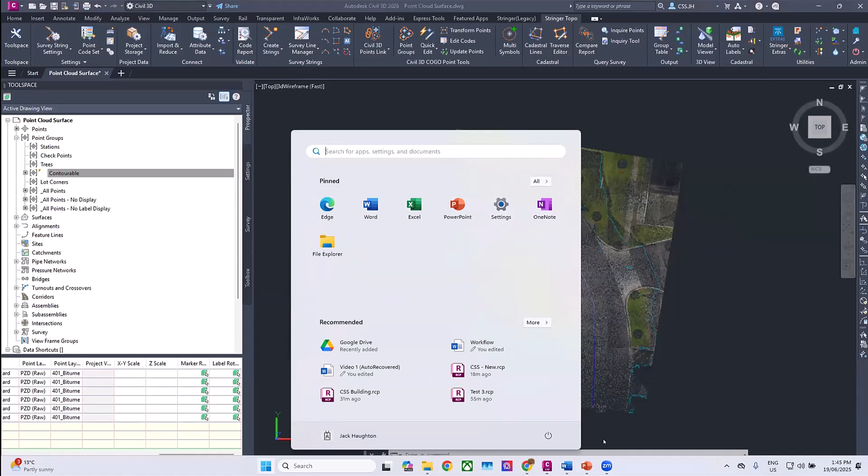But if you're working with buildings, just give me a second, I'm just going to open up a different PowerPoint. If you're working with buildings, I highly recommend running the publish command in Recap, which allows you to push out to the Autodesk cloud and using Recap Viewer. Now, sadly, I don't have a live example ready for us today, but Autodesk have provided us with a video on it that I'll just quickly talk over.

Okay, let's do it the manual way since it doesn't seem to like playing at the moment. So what we are able to do with Recap Pro is basically set it up so that we're able to work with it. You're able to create a scan to mesh. Now, the scan to mesh is going to look over the entirety of your survey and create a surface mesh out of the point cloud that you've got.

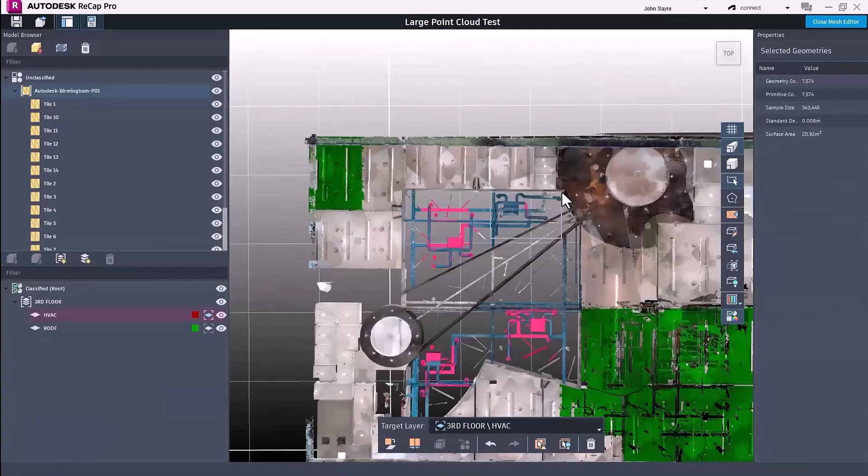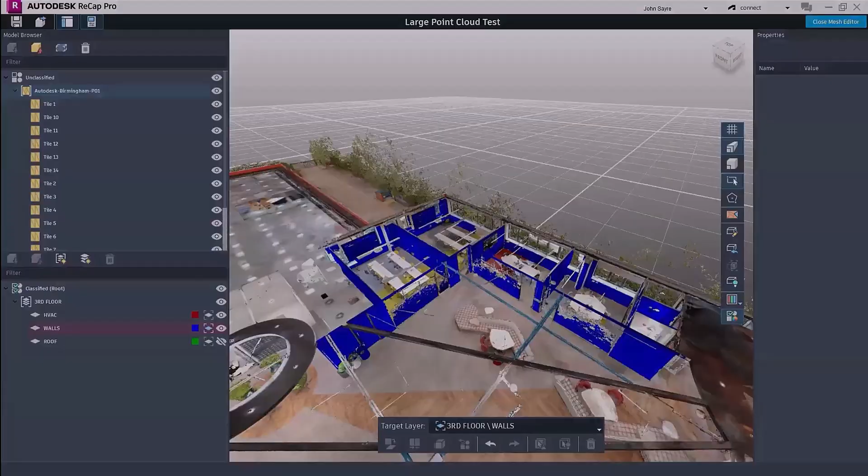From there, you're able to, as it states, very quickly create classifications to work with. And from this, you're able to also select basically walls out of the point cloud. The software is smart enough to select a dense amount of points and say, okay, this seems to be a wall. We're going to set it up as such. You can then export this out to Revit. So any Revit users in the audience, you're able to export all this out and use it for your architectural drawings.

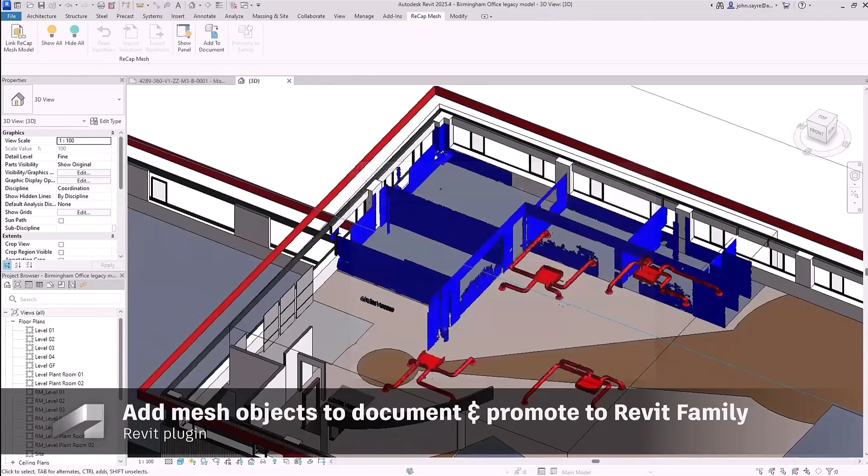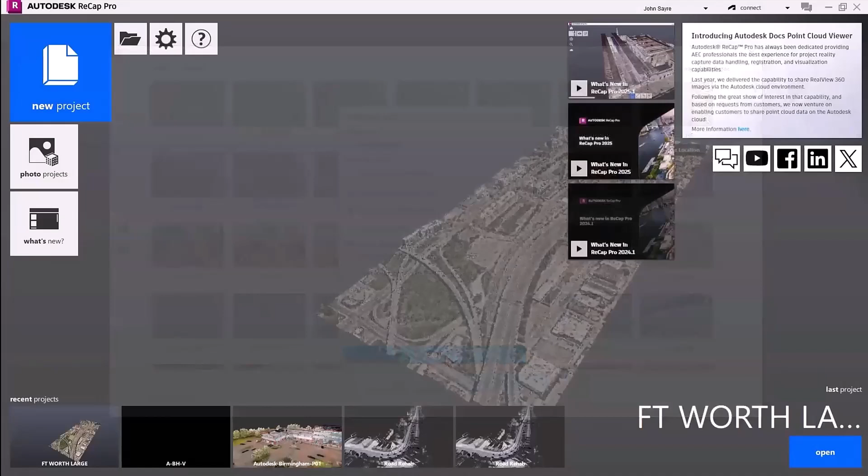One of the big things about Autodesk products is that they all are able to talk to each other. So you saw how easily I was able to go from Recap out to Civil 3D. It's just as easy to go from Recap out to Revit ready to work with. So this is actually creating a number of different files here. This is working with the photo section we talked about earlier. The photos are used to create a 3D mesh that we're able to create points on.

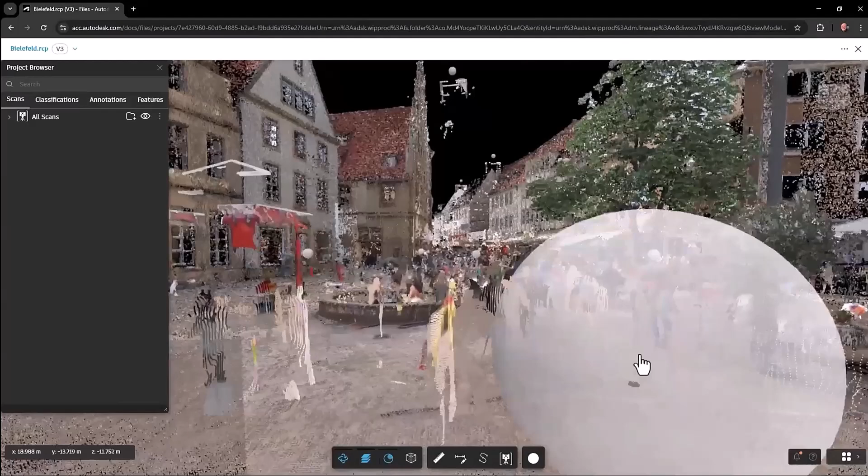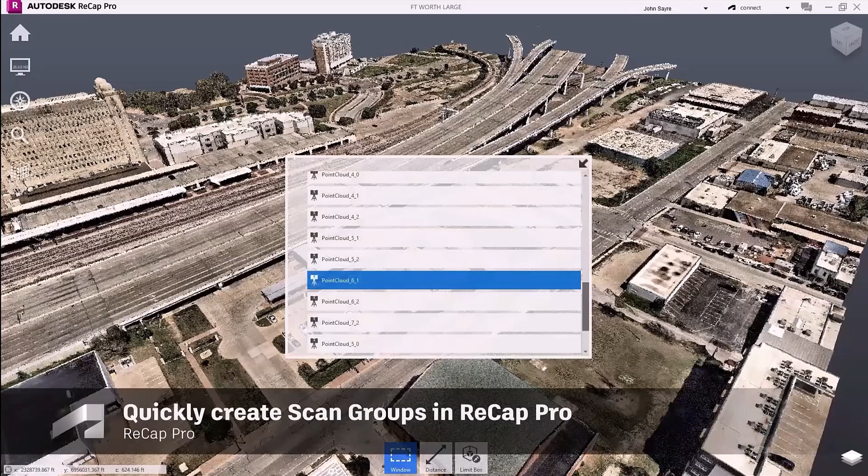But after you've worked with that, you're able to publish it out to the Autodesk cloud, where you're able to work in an online space. One of the biggest benefits about this online space is the fact that anyone who's attached to the project can view it. So if I published it up for myself and link Shane into the project, for instance, Shane would be able to also do any edits on it at the same time, and we could see each other working on it in real time. This is a very powerful tool.

It also allows you to use linear feature extraction, extracting various things such as the edge of bitumen in 3 separate lines at the same time, or your center of road, things like that, or especially your buildings. Yeah, a very powerful tool allowing you to work with it.

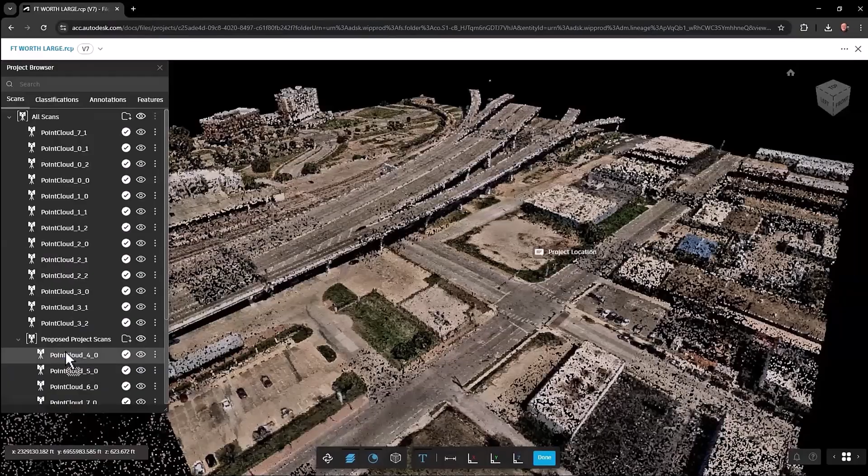Same as Civil 3D's project manager, you're able to work with multiple point clouds at the same time, publishing up multiple at the same time, attaching them to an individual project. So you can see here he has project scans and multiple under it, so the user would be able to see all three of those at the same time.

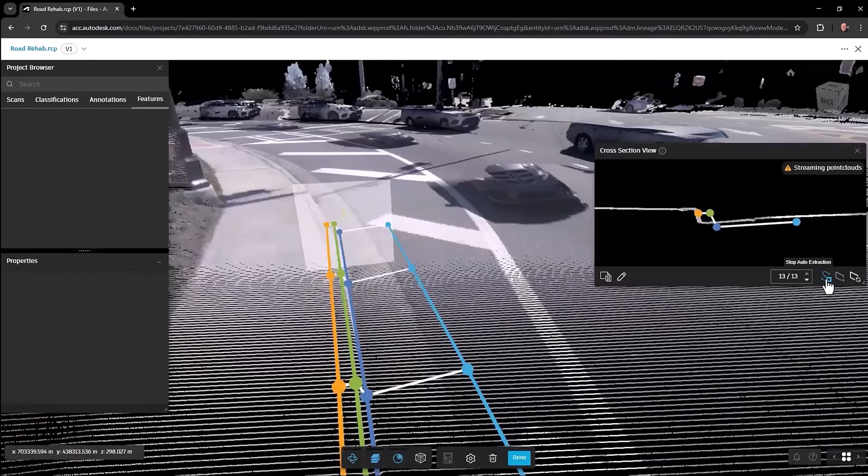This is the linear feature extraction I talked about, where they're able to very quickly go around to do it. For more accurate line work, I do think Stringer has the upper hand. It allows you to very quickly and accurately get your points down and create line work from it. But this is a good alternative if you do not have access to Stringer.